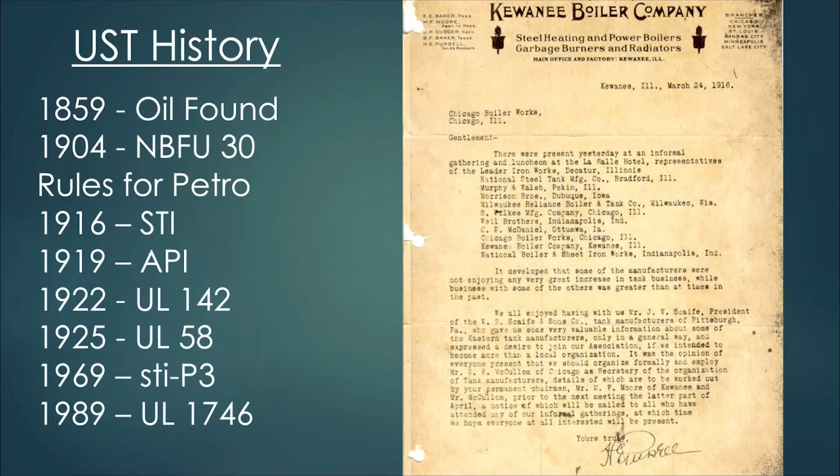It's also important when we consider the history of standards development for underground storage tanks to be aware of some of the other technological developments taking place. First, let's go back to why all of a sudden there was the need for storage of petroleum, petrol, fuel oil, gas, whatever you want to call it, in the early 1900s.

Lincoln Electric invented the first welding machine in 1907, looking just at the welding history. And interestingly enough, the Model T that Ford created started in 1908 to 1927, and there were about 15 million of those built. But it was basically a luxury type vehicle that only the rich could afford. It was not a commodity yet at that point.

The welding further developed. The first pipeline got put together in Oklahoma in 1914. The American Welding Society formed in 1919. Various electrodes developed in the 1920s. The boiler and pressure vessel code came in 1925. And a real popular weld procedure, submerged arc, in 1930. The point of all this is there was welding in the early 1900s, but it really did not advance to where it could be used for production of storage tanks until some 20-some years later.

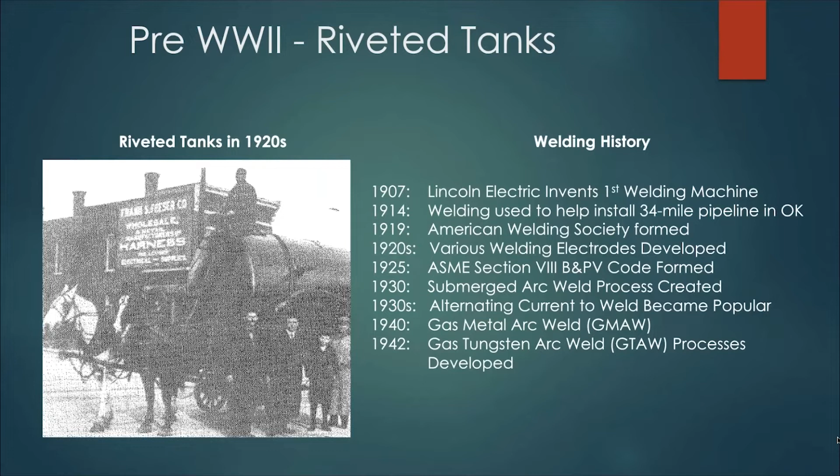So think back about what I just said with the cars and automobiles being developed. By 1927, the Model A was created and built from 1927 to '31 by Ford. This became much more of a vehicle that the common person could buy, and really created the need for bigger, faster production, which the welding process brought.

When I go back in the Steel Tank Institute files, I really don't see a lot of further standardization until the 1950s. The Midwest 56 standard was built and developed by both the steel tank fabricators and the oil companies. They wanted to standardize the size of the fittings on an underground tank and the location of those fittings so that things like fill lines, vent lines, and so forth could be connected and standardized at the petrol stations popping up all over the country after World War II. You can see the tank sizes were pretty small by today's standards. Today, we might see underground tanks of 20,000 or 30,000 gallons being put in, some with compartments. Back then, 2,000 gallon or 4,000 gallon was a popular size.

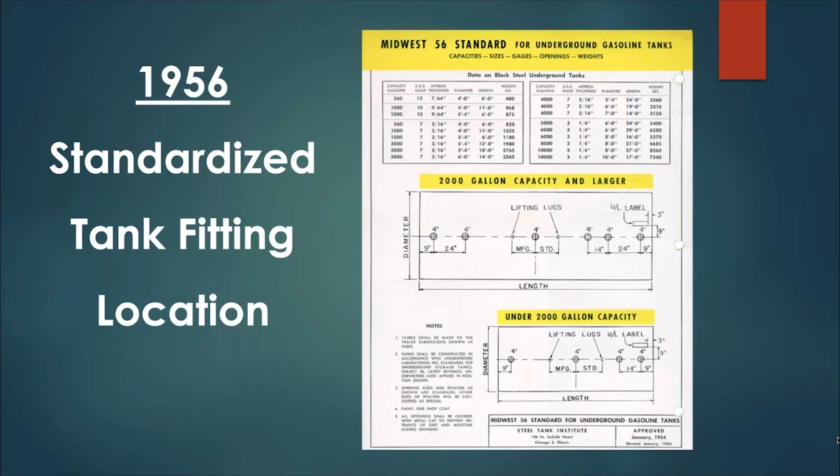In the 1960s, still before the environmental movement, the oil companies started experiencing corrosion from steel storage tanks being put in the ground, which did not have corrosion protection.

At that same time in the 60s, the oil companies were looking at it more as money out of their pocket, their inventory, not really an environmental issue as it is today. So there were a number of efforts being made by the steel tank industry as well as the oil companies to find tanks that could go in the ground that were corrosion resistant.

One of those studies was with a non-metallic tank, a fiberglass structural tank that Owens Corning was developing. The steel industry experimented with a couple things.

Clearly not acceptable installation standards today. But believe it or not, some of those baggy tanks actually came out of the ground in the 80s and 90s, and where there was not much groundwater around and the tape was sealing that plastic, it did a nice job of providing corrosion protection. Now, there aren't too many of them because the tape generally didn't last that long.

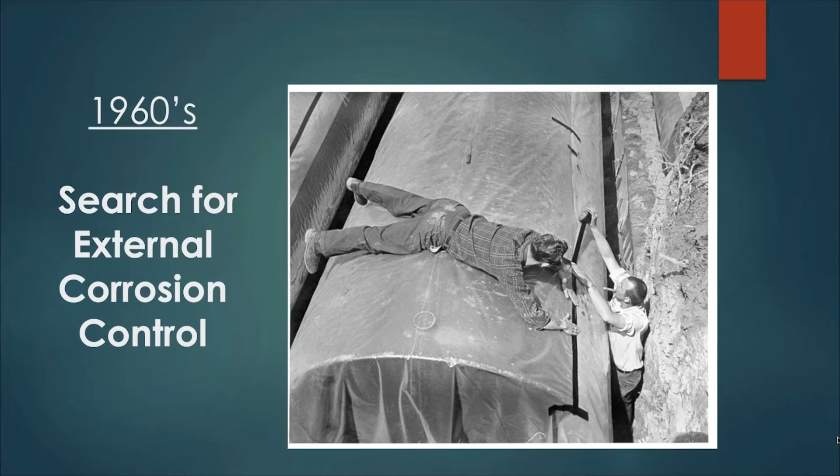But there was a company in Michigan in those days, and they actually commercialized and sold a package called Polywrap, a polyethylene wrap over the tank you see there. There were a couple other systems that the Steel Tank Institute and its members were investigating.

One was use of FRP coatings. As I said before, Owens Corning was developing a fiberglass tank, and the steel industry thought, well, maybe we can use that FRP, fiberglass reinforced plastic, as a coating. This was actually a standard developed by STI called STI-LIFE back in 1968, and it was the first technology where STI had a labeling system applied on the tank.

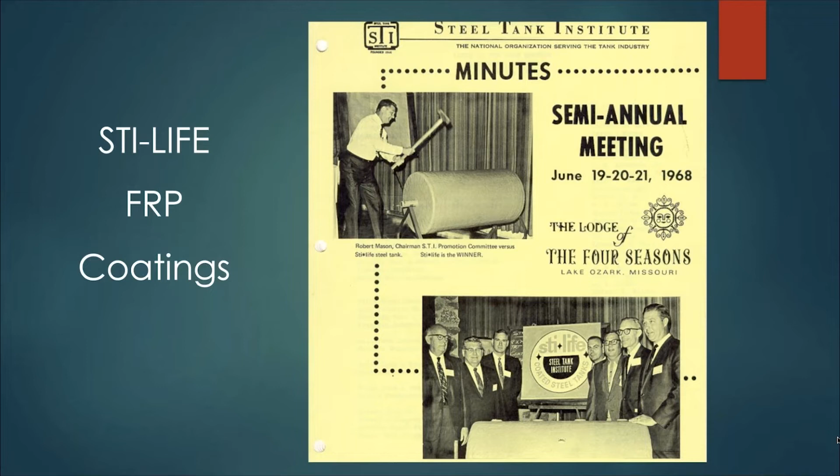So one other system being tested was a cathodically protected system. This system was called the STI P3, where P stood for proven protection in three ways. The three ways were through a dielectric coating, a magnesium anode, and separation between the steel tank and steel pipe through something like a nylon bushing, where the steel pipe and steel tank didn't touch one another.

I talked about the development of welding through the years. One of the big advancements that allowed the STI P3 tank to become successful was with coatings. Up until this time, underground tanks were just coated with a primer, an asphaltum coating, basically to prevent the tank from corroding while it was being shipped or stored in the yard or at the job site before it went in the ground.

People didn't really understand that groundwater and soil could have a corrosive effect on steel. As coatings progressed, that soon got replaced with the STI P3, which necessitated the use of a high-tech coating at that point called coal tar epoxy. Later, that coal tar epoxy became replaced by another coating in the early 80s called polyurethane, which was a much more productive tank coating to apply because it could be applied and cured in an hour, whereas coal tar epoxy took maybe a day to harden up, and it also had some solvents in it.

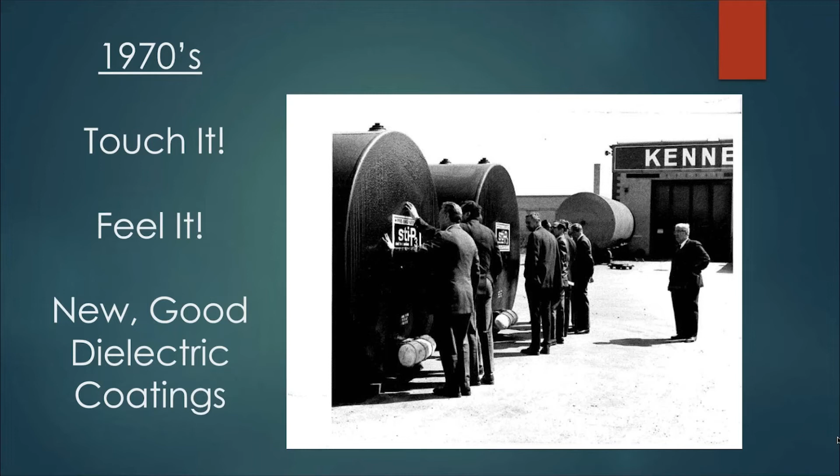You'll see some more pictures here, and rather than myself go into detail, I'm going to turn this over to Steve Pollock, the Director of Technical Services for Steel Tank Institute.

Thank you so much, Wayne. I appreciate the history leading up to these tanks. What I'll talk about from here on is a bit about what you mentioned, the 1988 promulgated federal regulations and the designs that go in to meet these.

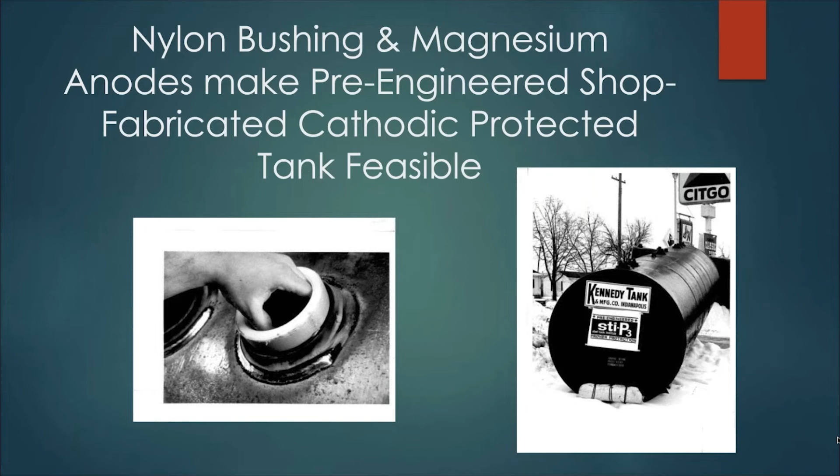As Wayne mentioned, tank construction was modernized and coatings became modernized. This slide shows the three ways of protection: there's a coating on the tank, sacrificial anodes, and the installation of a nylon bushing into the top fittings. Those are important for making sure that any other tank appurtenances on top do not short out the tank, causing the sacrificial anode to try to protect more steel if someone connects a steel vent pipe or steel piping to a submersible pump. So the nylon bushings are a very important part of that isolation.

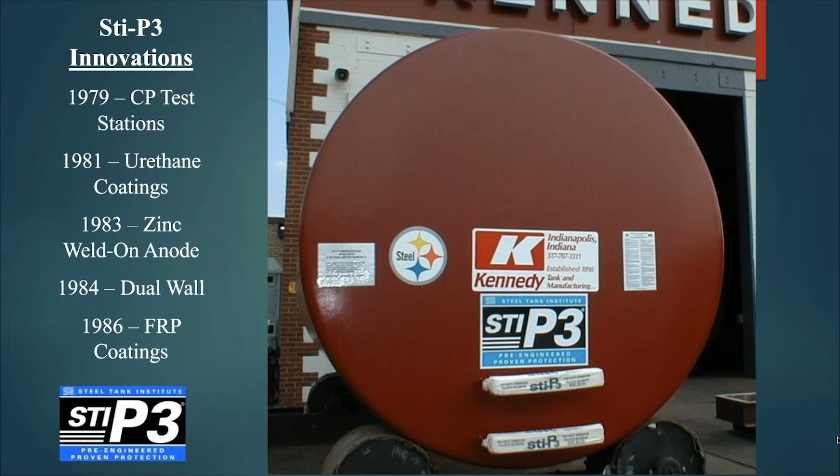More innovations were encountered over the years, and we're very proud of what we worked on. In 1979, cathodic protection test stations were developed. You may have come across these out in the field and heard references to PP3 or PP4 test stations. The idea was to make testing simpler for owners, using a voltmeter connected to the steel of the tank and a buried reference cell.

Wayne had mentioned the urethane coatings. Those came on in 1981 and were an important aspect of improving our coating systems. One thing that came about based on installer experience was that it became important to weld the anodes onto the tanks. The anodes used to be shipped separately, and installation instructions required the person in the field to wire the tanks and attach the anodes, which was not being done consistently. So we decided that welding the anodes on was a better development.

In 1984, we also looked at dual wall technology, and double wall tanks with interstitial monitoring were developed. Wayne mentioned another coating development too - we looked at FRP coatings on these tanks as secondary containment. Now we know secondary containment is the rule of the land based on the 2005 Energy Act and the regulations promulgated in 2015, but double-walled tanks have been around for a long time.

In 1981, Type 2 double-walled tanks were being built. These tanks were intended to hold 110% of the capacity of the primary tank within the secondary tank. The tank construction was very expensive, partly because it used a lot of steel. The phrase Type 2 means there were standoff panels between the primary and secondary tanks, providing inches of interstitial space. Europe had been working with a technique of 100% containment instead of 110%, which was an intimate marriage of the secondary wall to the primary wall.

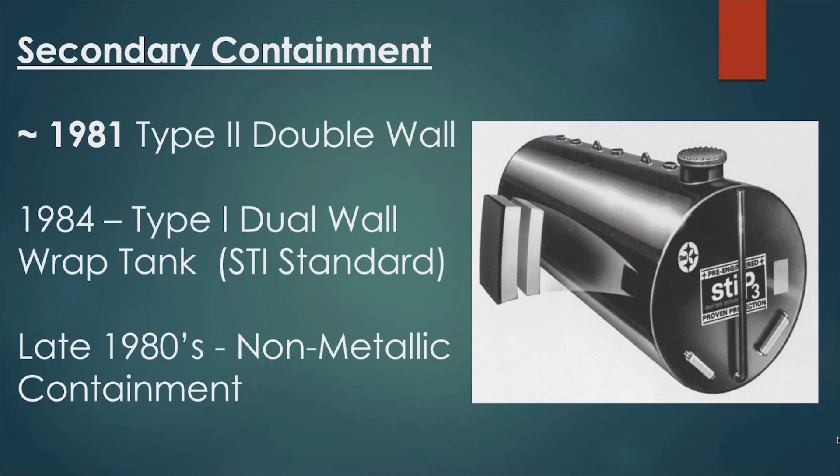The Type 1 tanks were adopted in the mid-80s. In 1984, we were working with a Type 1 dual wall wrap tank, which fits STI standards as well as UL standards. In the late 80s, we started working with jacketed tanks, which became part of what we work with more now. We'll look at that in the next slide.

One of the other components we looked at in the mid-80s as a unique addition to these tanks was fitting all of the fittings into one containment sump. You can see there's a P3 tank with a collar around all the fittings, and that collar is coated. The rest of that containment sump has to come up to grade. Again, we're talking about preventing corrosion with coatings, anodes, and isolation. To complete the containment sump up to grade, we still had to include isolation around that collar and isolating link seals connecting the rest of a steel sump all the way up to the top of the grade of the tank. Plastic and fiberglass sumps came out a bit later - these steel containment sumps were heavy and hard to work with. You probably won't run into these very often, but that was one of the unique innovations we looked at in the mid-80s.

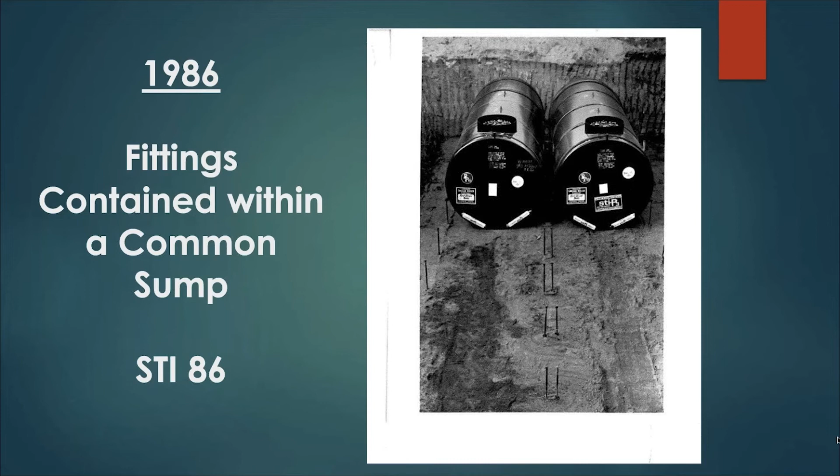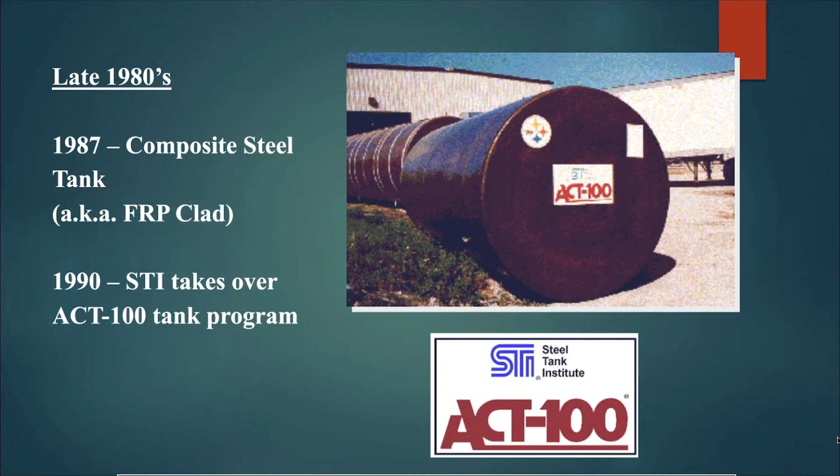One question that comes up from regulators, which I actually used to ask when I was a regulator, was: when were the first composite tanks? Wayne showed you pictures of some of the original attempts with Stylife, fiberglass coated tanks back in the late 60s, and technically you could call that a composite tank. The formal notion of a composite tank came with manufacturers who developed the Association of Composite Tanks and created what we know as the Act 100 tank. Most members of ACT were also Steel Tank Institute members. After that, the ACT FRP clad tank was formally developed in 1987. STI took over that technology in 1990, and the Act 100 tanks are still produced today.

In 1991, the next development was an FRP jacketed tank, known as our PermaTank technology. Even though it's from the 1990s, it's acceptable now as secondary containment rules take place across the nation. This is a steel tank with a close intimate wrap fiberglass material sprayed on, allowing for interstitial monitoring of the interstitial space. This has been one of our more successful tanks, produced across the nation and the world.

Our standards engineer, Joe Menser, is going to talk about above ground storage tanks in the next session.

Thank you, Steve. We've been discussing underground tanks, and we can also include above ground tanks in this discussion. Above ground tanks actually predate the underground units. However, they were limited in use due to regulations requiring them to be separated from people's residences, and the requirements to provide containment caused problems.

But in the early 1990s, some design options became available that addressed those issues. One was the creation of a double wall tank using similar technology as the underground tank, providing the necessary secondary containment. Then came insulated tanks, with an insulation system that allowed them to be placed closer to people or businesses because they could withstand some minimal exposure to heat. This increased opportunities to use above ground tanks, and there was a feeling in industry to get away from some underground tanks due to earlier problems.

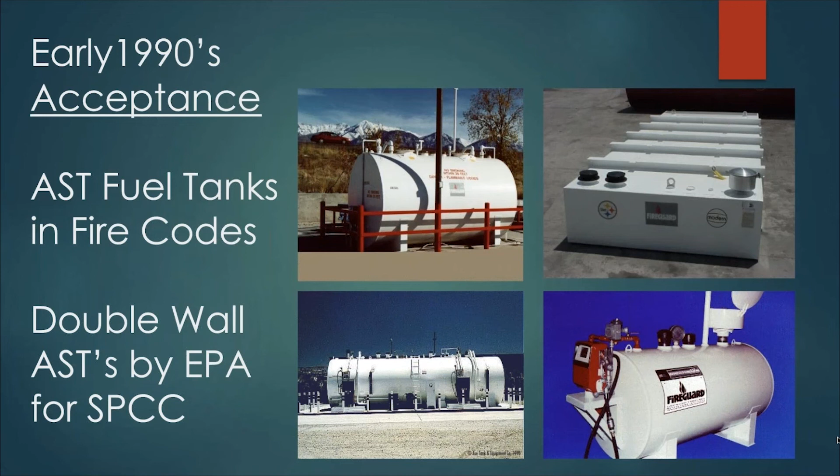We've seen the introduction of compartmentalized tanks, where a common shell holds multiple smaller tank units so that one tank unit can store multiple products in multiple sizes. It makes installation more convenient and operation easier, and reduces the amount of equipment. That can be done with both above ground and underground units.

The double wall design addresses the secondary containment requirements for underground tanks. Steve mentioned there are federal laws that require those. Likewise, for above ground tanks, the federal code called the SPCC standard requires secondary containment for storage tanks.

We've learned over the years that steel tanks especially have excellent compatibility with biofuels and the new fuels being introduced. History has shown that steel can hold up fairly well to all of the materials that people have included in motor fuels.

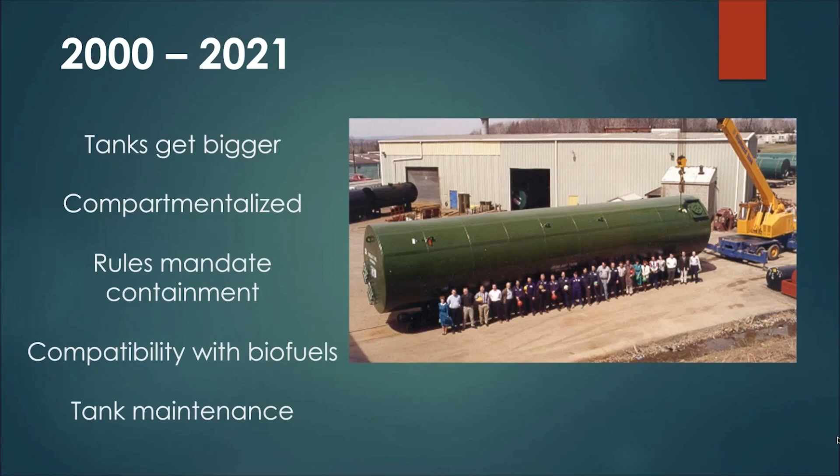We've also learned over the years that proper tank maintenance means tanks operate as the owners want them to, reliably and safely storing the product so it's available when needed. For issues of discussion, these are things that often come up when we talk to people about tanks. Let me hit them briefly. If you're looking for information, you can go to our website, www.steeltank.com, and there's information on all of these.

For water in tanks, water is the enemy of fuel storage, so care must be taken in design and operation to keep water out. We have advice on how to control and manage water. There are methods available to remove water if found, and through proper design and maintenance, it shouldn't get there in the first place. Bear in mind water will damage both the product and the tank if it remains, but it can be managed if an effort is made.

For tank repairs, one of the great aspects of steel tank construction is that it is repairable, it is modifiable. We have standards that address those as well, available on our website. Steel tanks can be repaired or even slightly modified if called upon.

For lining in steel and fiberglass lined tanks, there are options available, especially if water continues to be a problem, or if the tank is used infrequently, like an emergency backup generator, or when people store other chemicals in tanks. If you need help with linings, we can help you with that.